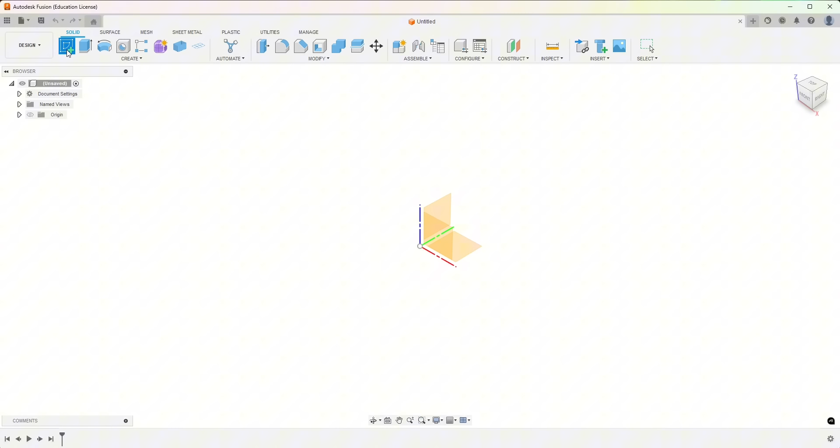So let's start by making a basic jar. I've showed this before, but I'll go through it quickly, and this way it's kind of easier than what I've shown in the previous video. So start with a cylinder and click this bottom plane. Again, you can make this any size you want. I'm going to make it 75 millimeter diameter, and we're going to go up 60 millimeters and hit OK.

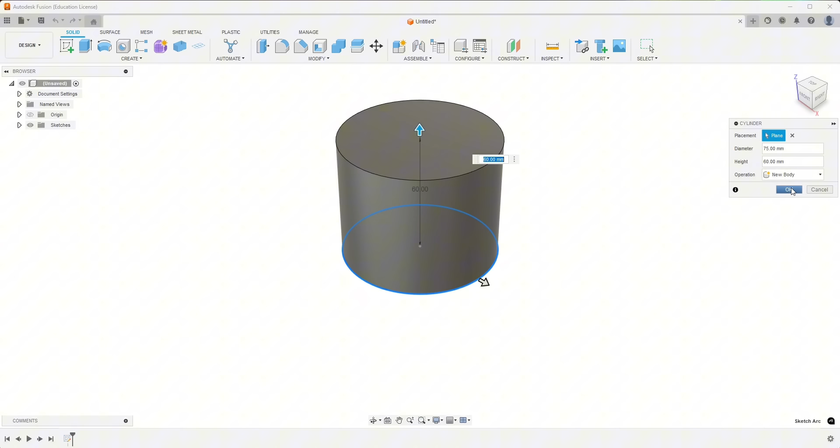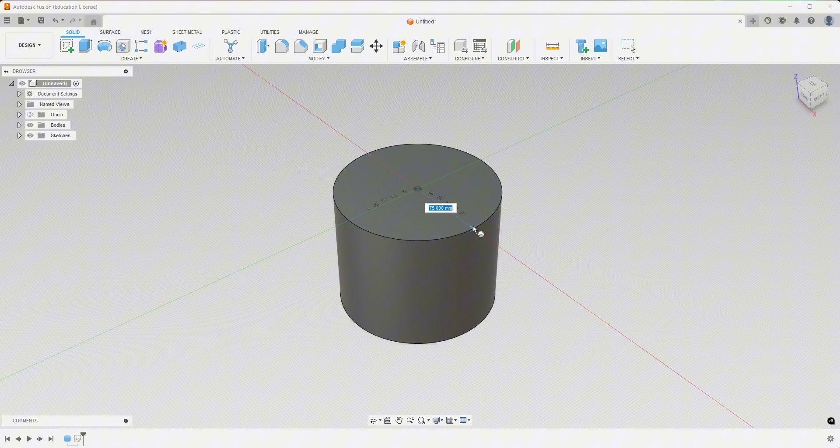So this will be the body of the jar, and we're going to do the thread portion. So let's make another cylinder. Instead of clicking on one of these planes, we're going to click on the top of the jar, click the center, and since this is 75, I want a 3 millimeter spacing here between the outside of the jar and the threads. So this will be 69. Hit OK, and we'll go up. Let's go up 10.

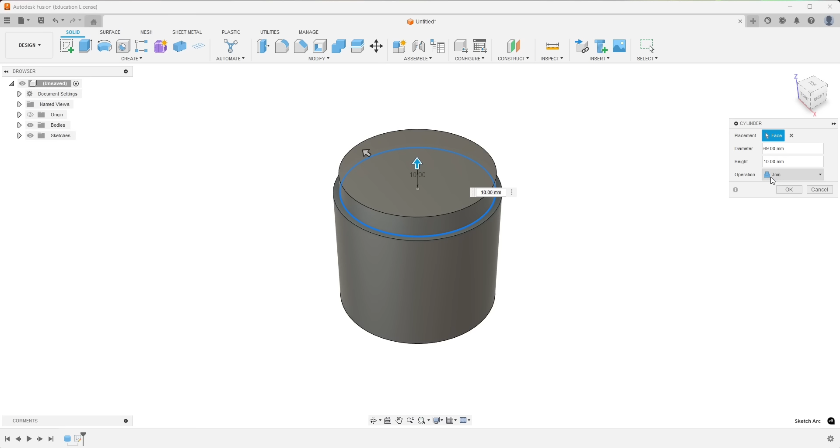And we don't want this second cylinder to be a new body. I just want to connect it to the previous cylinder. So I'll hit join and hit OK. And you can see when we go over to bodies here, now it's just one solid body. So we can go ahead and hollow this out. And to do that, we use the shell command or the shell tool.

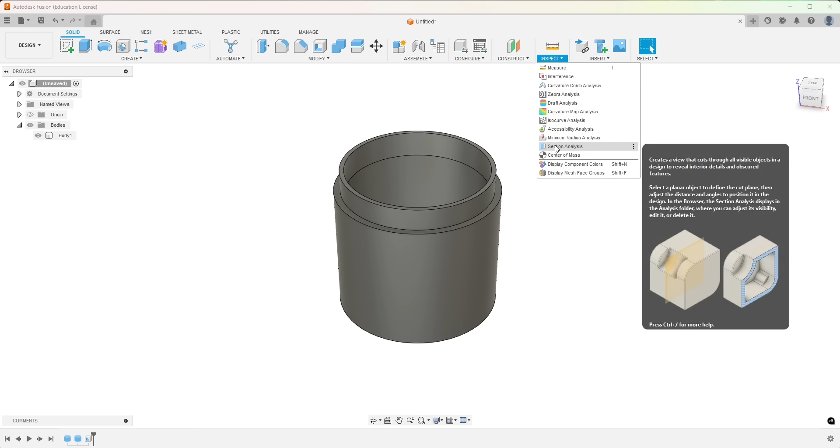So we'll click the top of this jar. We'll click shell and we'll hit 2 millimeters because that's how thick I want the walls to be. You can see that hollowed out that jar nicely. And hit OK. And I'm going to do a little section analysis here. So to do this, you hit inspect, section analysis, click this front plane here, and then you can hit this flip button to flip it around.

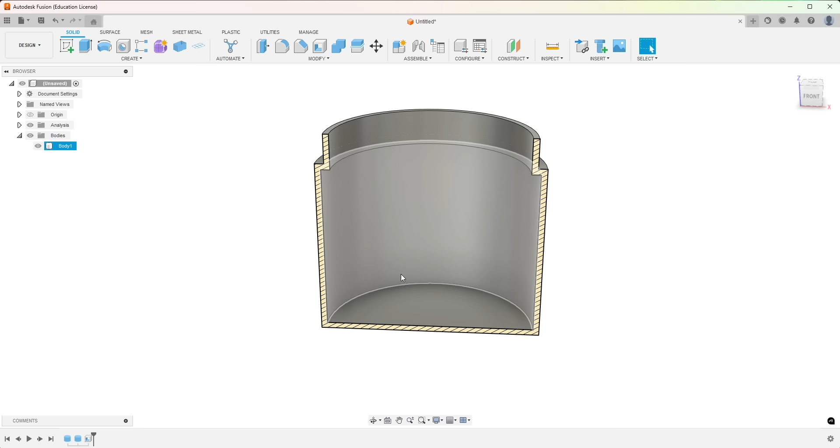And we got to clean up this inside a little bit since this will be 3D printed. I'm going to put a chamfer on these lines here. To select more than one line, I'll click off it to deselect it. You hold shift, so you can click while you're holding shift, shift click again, and now you have these two lines. And I'll do 3 millimeter chamfer and hit OK.

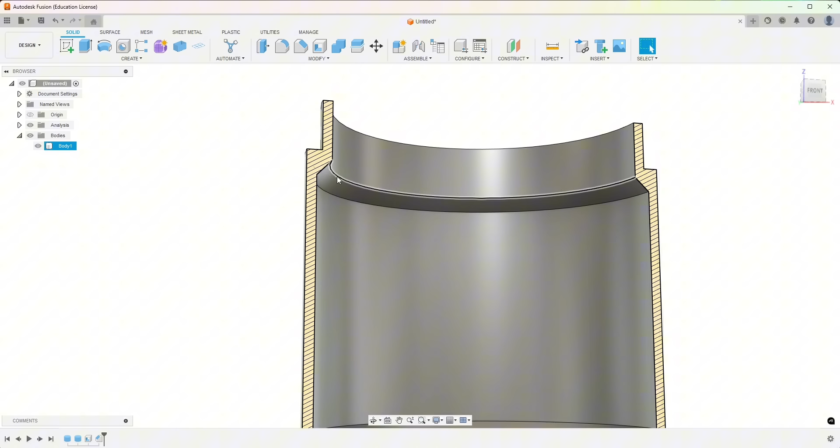Now the purpose of this chamfer below is just to strengthen this corner. When you 3D print this, this will make this connection between horizontal and vertical walls much stronger. And this chamfer is because when this was straight across at a horizontal line, there's a big overhang there. So the 3D printer would have problems printing that without some sort of support. So that fixes that issue.

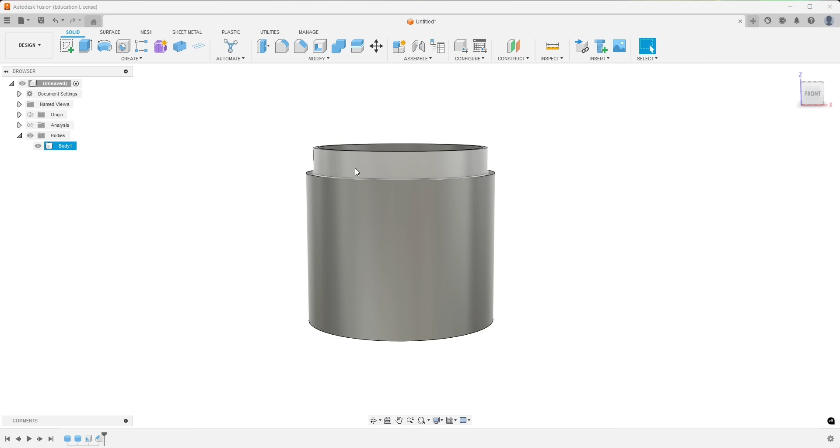So we can turn analysis off. When you make an analysis, there's a little tab over here, and you can make multiple different analyses, and you can turn them on and off. We're just going to stick with that one, so I'll turn it off for now. And now we'll make the lid. If you remember, we made this 10 millimeters high.

So let's make another cylinder for the lid. And we're going to click on this plane because that's where we want our lid to start. Click again in the center and drag out. And we don't want this to cut away from what's there. So we're going to do a new body.

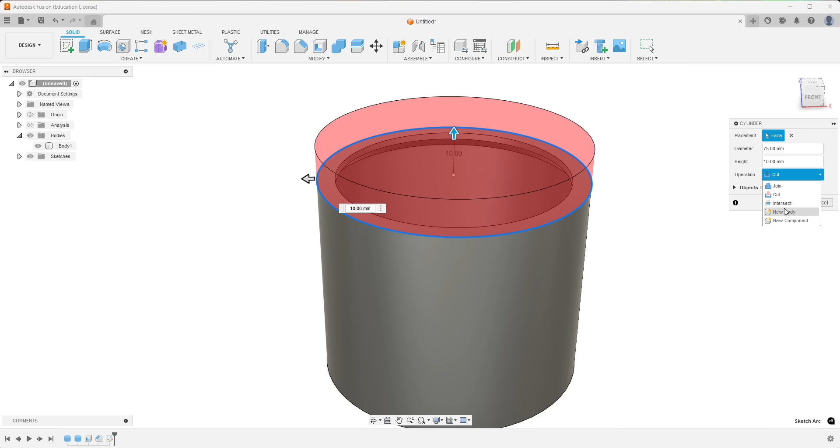And this needs to be at least 12 millimeters tall because the threaded part is 10 millimeters tall, and we need to have a wall thickness of 2 millimeters. So I'm going to make it 13 millimeters just to give us some space. So I'll hit new body because we don't want it to join or cut. Hit OK. And you can see now we have two bodies here. And I'll name these. So this will be the base.

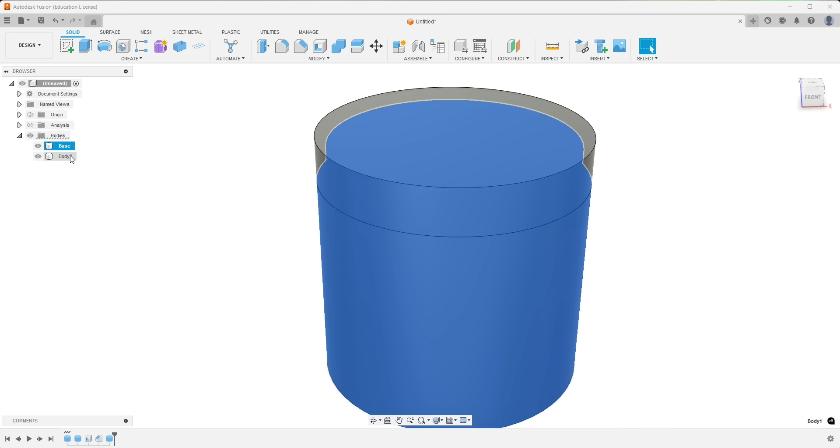And click in here again. This will be the lid. So we can hide the base for now. And we're going to do the same shell command here. So shell, and we're going to go 2 millimeters and hit OK.

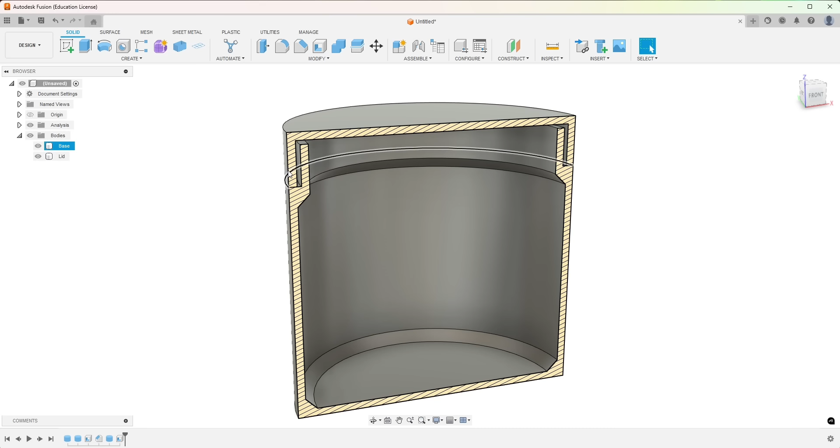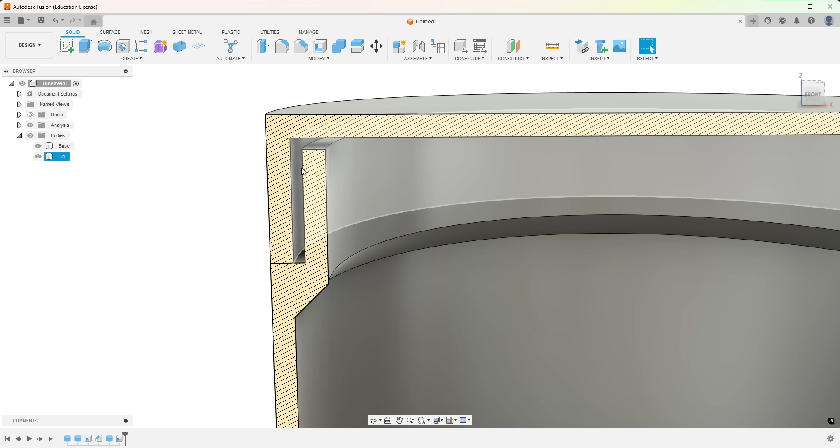So this is really important how I constructed this. No matter what size you make your jar, you want to do something similar, especially with the way I'm going to make these threads. So we have 2 millimeters of wall thickness here, 2 millimeters of wall thickness, and then a 1 millimeter space. Remember, we made this space right here 3 millimeters, and now we have a lid with a 2 millimeter wall thickness. So just remember this, 1 millimeter gap here, that's important.

Okay, so let's get making the threads. I'll turn my analysis off. So we're going to go to coil. And actually, before I do, let me make sure I got my measurements right. So this is 69 millimeters in diameter. Okay, so let me explain something before I do it. I want to make the height of my coil or thread. Oh, you know what? I'll explain it as I go.

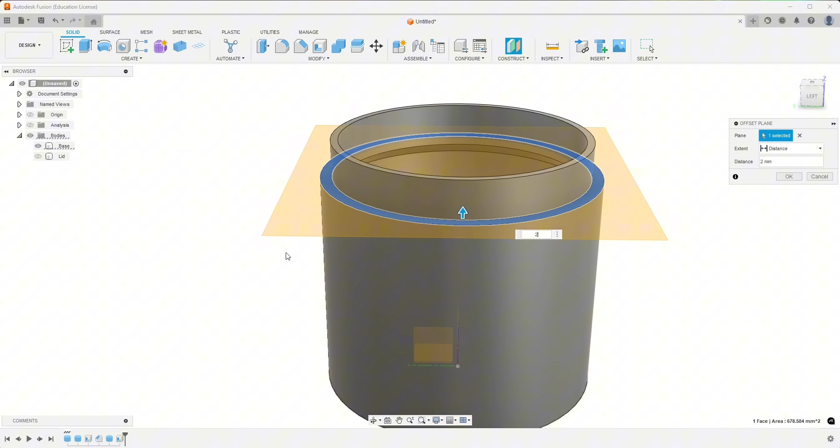It'll make more sense. So I'm going to do a construction plane because I don't want to start the coil on this plane because then the thread will be running into the bottom. I could do that and that's fine, but that's just not how I'm going to do it. So I'm going to click construction offset plane, click on this, and I'm going to go up 2 millimeters and hit OK. And now you can see I made a plane 2 millimeters above this base, and that's where I'm going to start my coil.

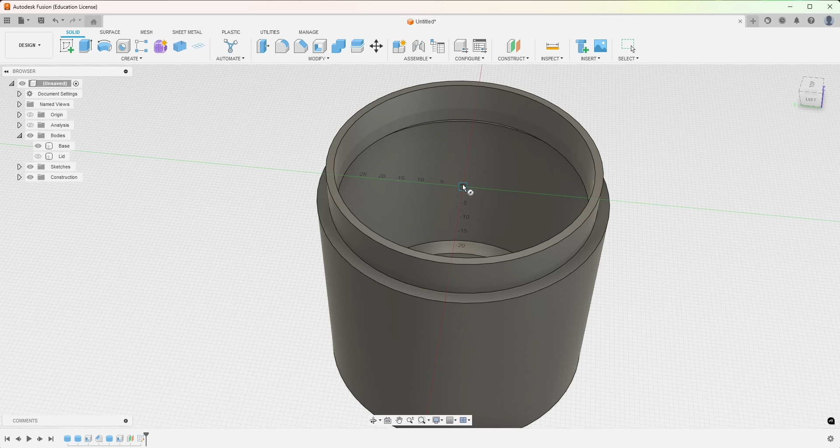So coil tool, and first it's going to ask me what plane I want to draw on. I'm going to do the one I just made, and I have to pick the diameter, so I'm going to click the center. And now, unfortunately, because we made that plane, I can't snap to any of these lines. But we know this was 69 millimeters, and I want to make it 0.2 millimeters less. So I'm going to do 68.8.

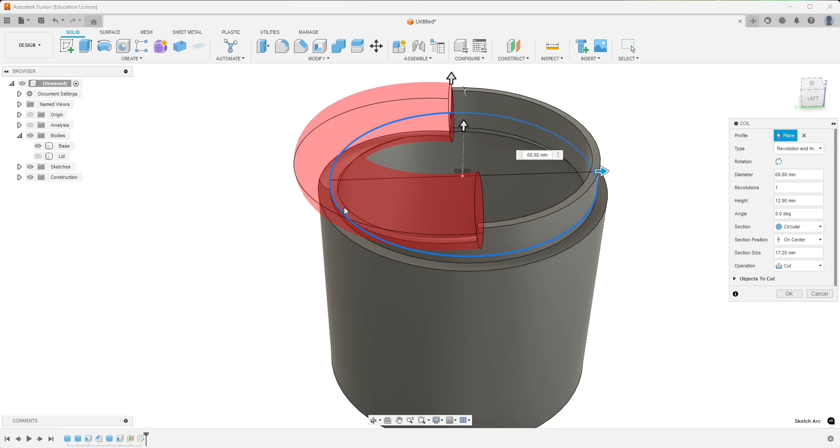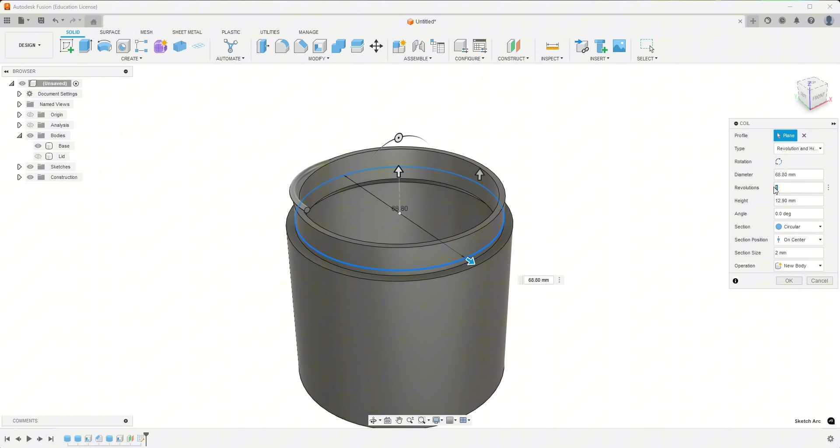Okay, so now here are all the settings on this side for the coil. We don't want this to cut. We want a new body. So you can see it turns it into a new body. The diameter of this coil, that's the section size here, is going to be 2 millimeters. The revolutions, I'm going to do 0.5, so a half revolution. And then I'm going to do the height at 6. And I'll tell you why I chose 6 height. The height is just basically the start of the coil to the top of the coil.

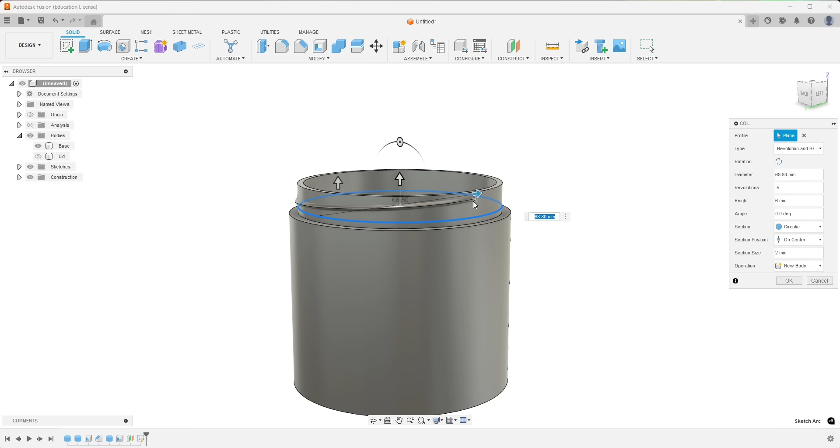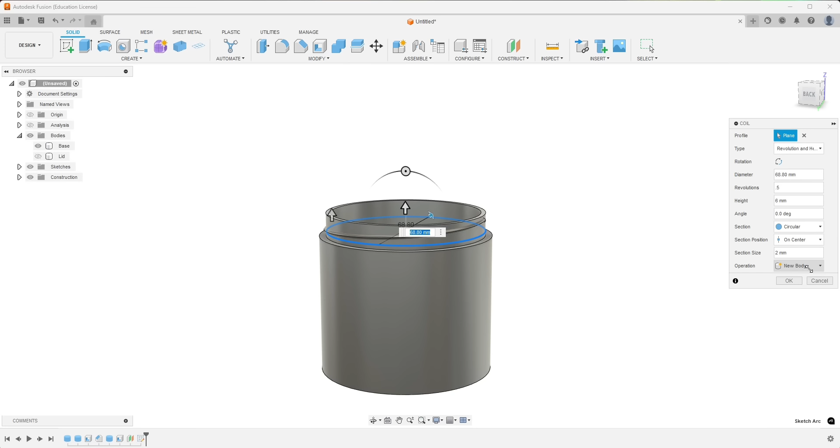Now, if you remember, this section here of the thread is 10 millimeters. So I started 2 millimeters up, plus the 6 millimeters for the coil, that makes 8. And then we have another 2 millimeters on top of the coil. So it's perfectly even. So we want to make sure new body is checked. And if your settings aren't like this, I have circular on and on center. You can change this to square and triangle. You can play around with this to make different types of threads, but I find this to work really, really well for 3D printing. So I'm just going to keep it as new body and hit OK.

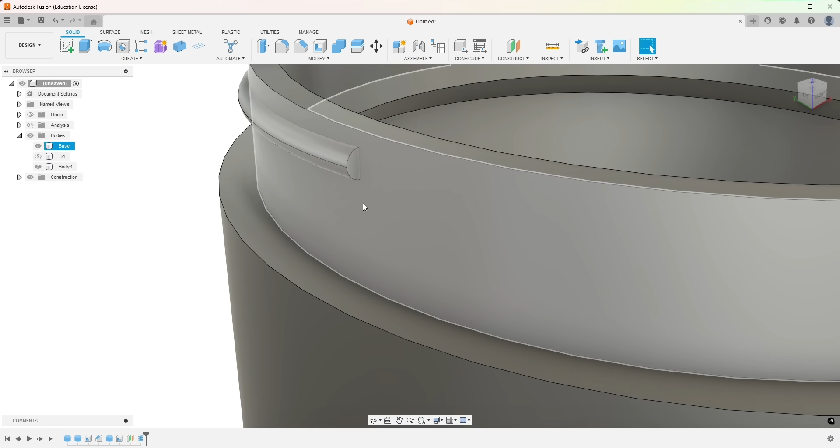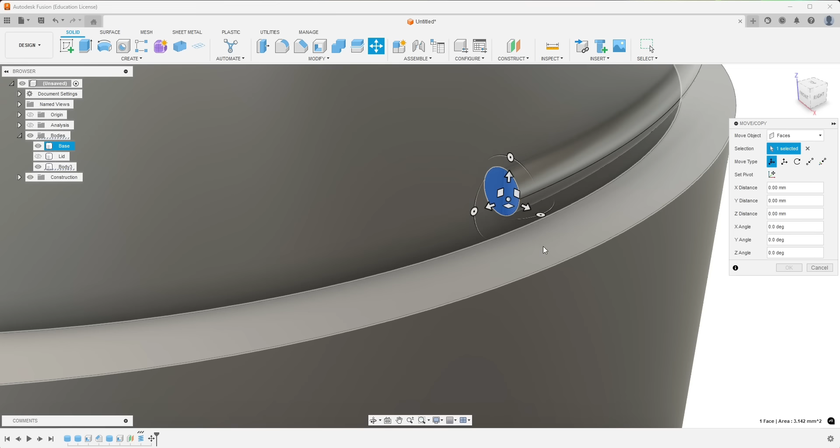And now you can see I've got a new body over here, which are the threads. So we're going to ease this sharp edge on both sides. So click on that circle and hit M for the move tool. And we're going to rotate 70 degrees and hit OK. And you can see how that rotated that face. And so now we're going to do the same for this side. M for move tool and rotate this 70 and hit OK.

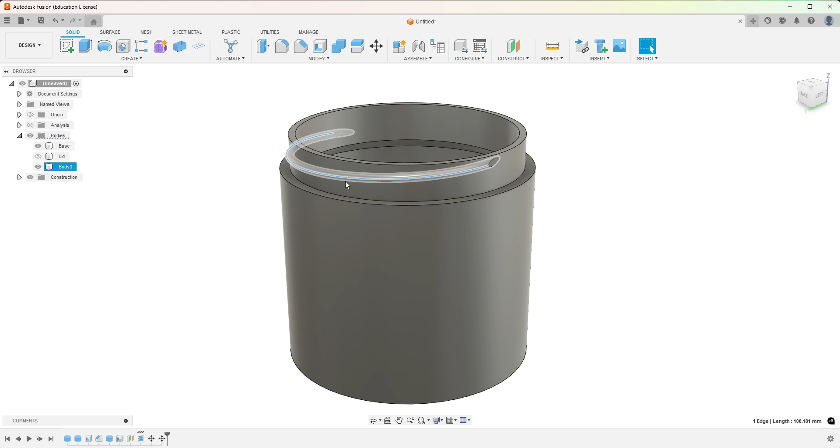All right, and now what we want to do to make this a triple thread is pattern this around this diameter or around the threaded area. So we can click on this body. You can do that by either clicking the body of the thread, or you can come over here and click the thread body, body 3. You're going to go up to create, pattern, circular pattern, and the little window pops up.

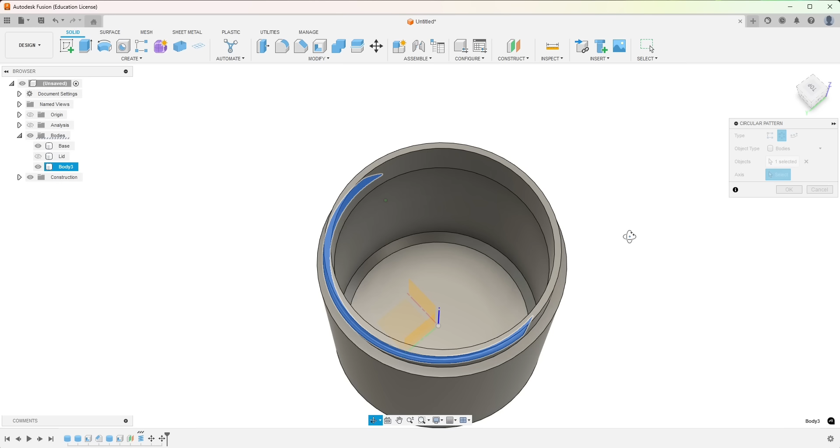The object type is the body we already have selected right here, and then it wants to know the axis, so you click this, and we're going to choose this Z-axis, but you can see the jar is in the way. You could rotate here and select it right there, but if you want to not do that, all you have to do is click and hold over the axis. This pops up, and then you can go down to Z, and it selects that Z-axis for you. Now you can see it just made a ton of them. If you go over here, it did 6 of them. We only want 3.

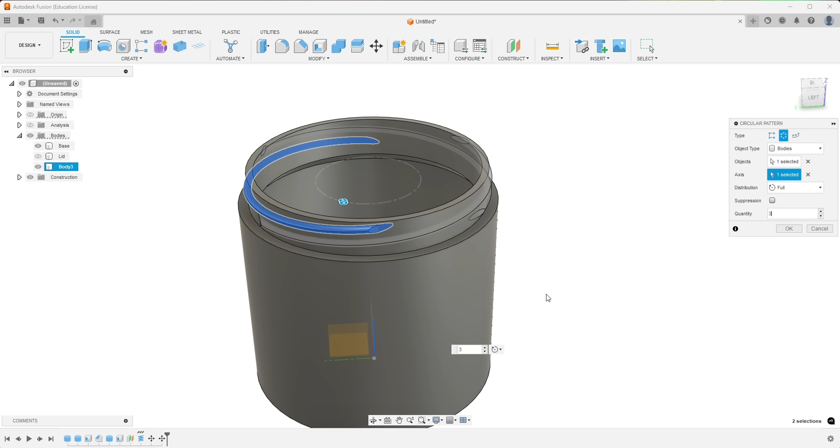So I'll hit OK. And let me just get my thing centered here. So here's my 3 thread bodies. And now you can see I've got a triple thread. And the reason this works is because there's no gap, starting here at the rim at the top, going down to the bottom.

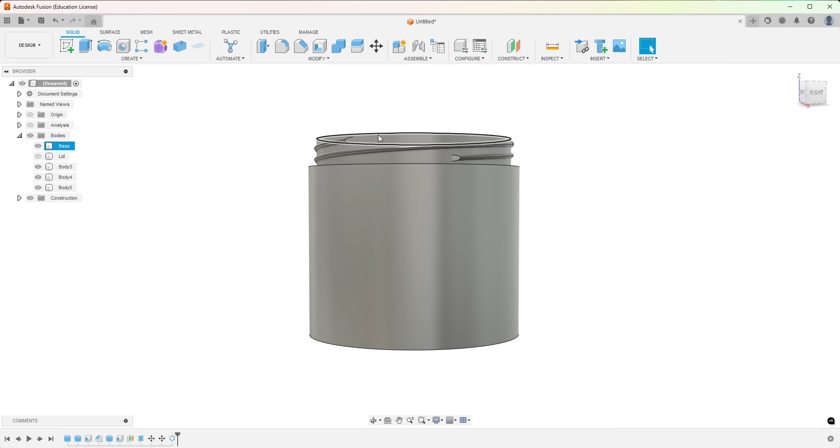There's no clear path to the bottom of this threaded area without running into threads. So if you're only going to do 2 threads, you have to make sure that those threads overlap each other. Otherwise, you could take the lid on and off without doing any twisting. So, okay, now we're going to join these together. We're going to make this one body. So we do that with the combine tool.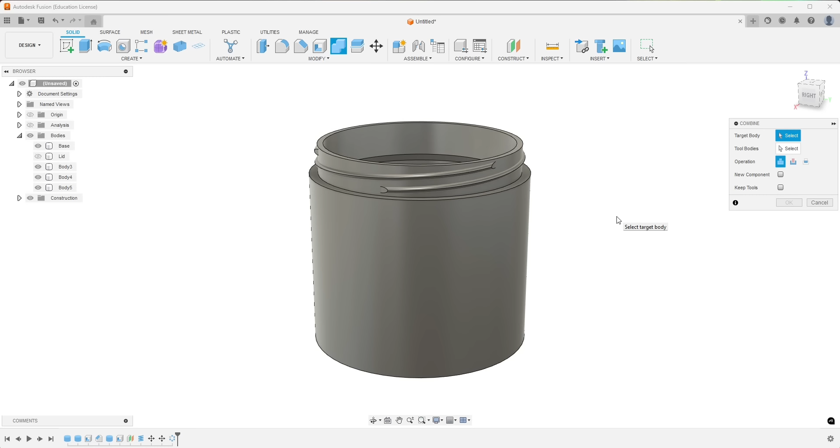And whenever you click on a tool, usually a little window pops up and you have to choose your options. So first it wants the target body. So basically the body that we're going to combine things to. So we're going to choose the jar as the target body. And then the tool bodies are the pieces that we're going to combine to the target body. I hope that makes sense.

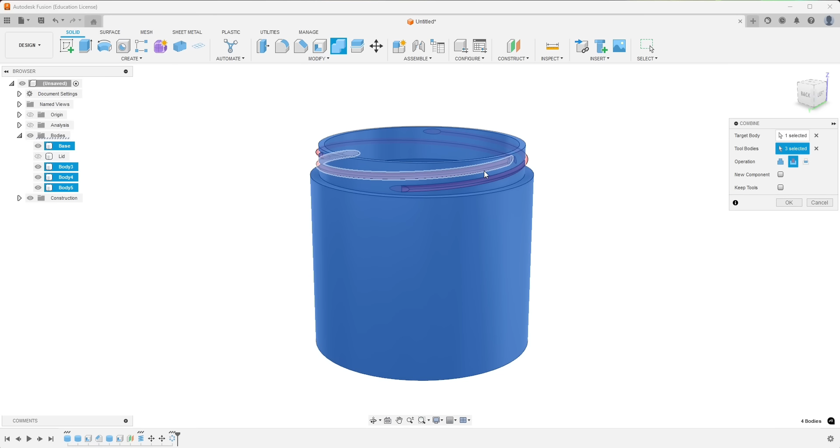So we can click on these threads and watch as I click here, you'll see this number go up here. So I have 1 selected, 2 selected, I'll rotate around, and 3 selected. And there's a few options here. We're going to do join, but you can do cut, and it'll cut those bodies away from the target body. Or you can do intersect, and it'll only keep where they're both touching, which obviously we don't want. So we're going to go to operation join.

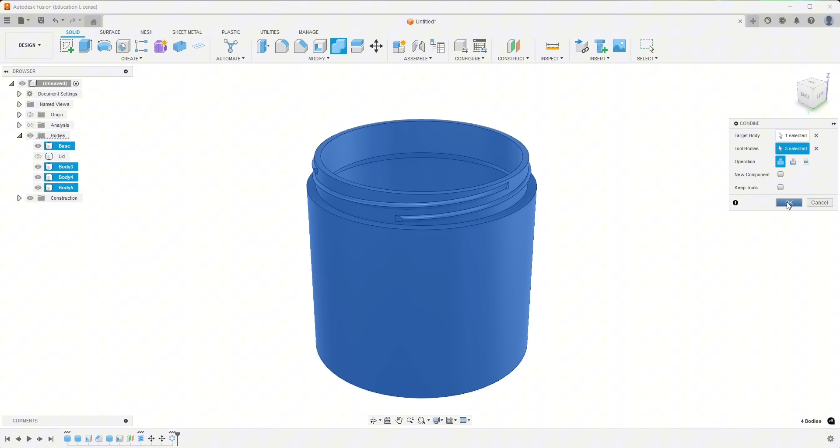Now you can choose to keep the tools. And remember, in this case, the tools are the threads. So if we clicked keep tools, it would combine this and make it all the base, but then it would keep these threads, which we don't need anymore. So we can leave that unchecked. So now you can see we only have the base body left, and these are now combined.

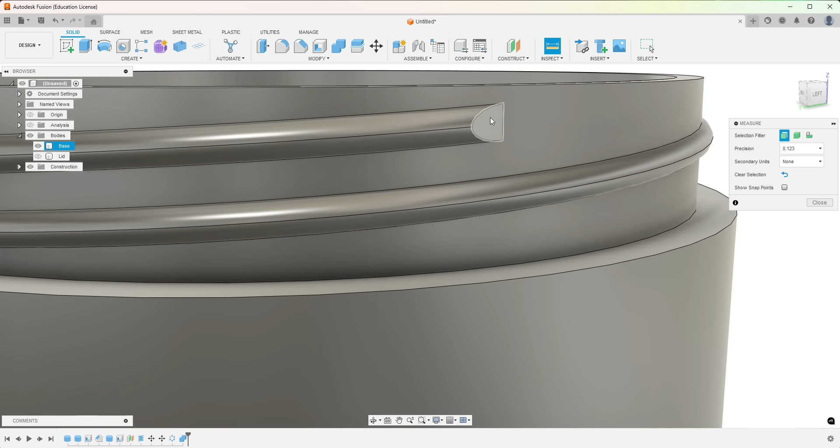Now, when you're making your threads, and I know I have to check this because I've done this before, you have to make sure you have enough space between threads. And I made this mistake on purpose just so you can see how to fix it. So if we go to inspect and measure, we can click on this line and this line, and we have just a little over 2 millimeters of space here. And if you remember when we made these threads, we made a 2 millimeter diameter circle, which means we have hardly any allowance here for the threads on the lid to sneak through. So that's not going to work.

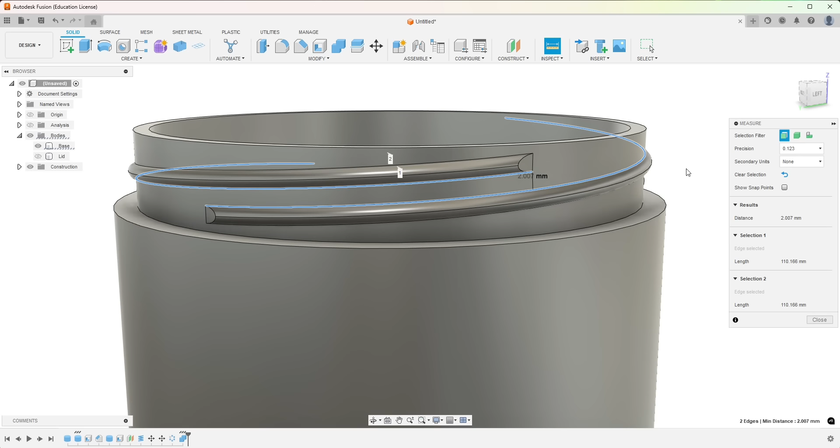So what we can do, cool thing about Fusion is you have this history down at the bottom. And this is where we made the coils. And so we can double click on these coils, and we can make changes and it will update along this history as long as the changes don't affect anything past this feature. So I'm going to change the height to 6.5. And you can see that just lifted that up a little bit. And now I'm going to hit OK.

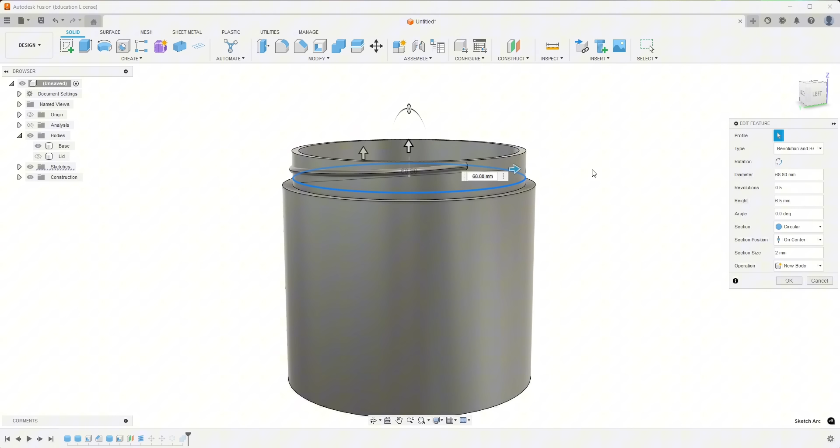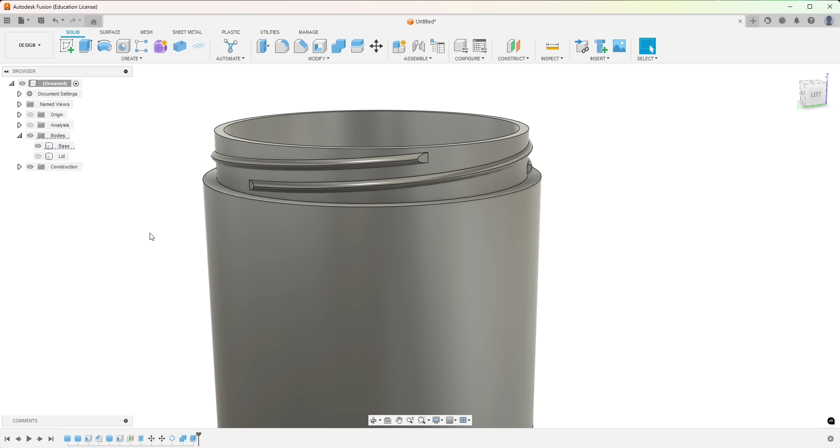And that does mess with my even spacing, but you know what? We can change that too, because I can just select this face right here and hit E for extrude and go up 0.5. Now we have 2 millimeters here, 2 millimeters here. Definitely not necessary, but sometimes I'm a perfectionist. So now we can measure this space again. So we can hit the measure tool, click this line and now we have 2.339 millimeters. So we have enough space for the other threads to fit through with an allowance as well. So we can hit close.

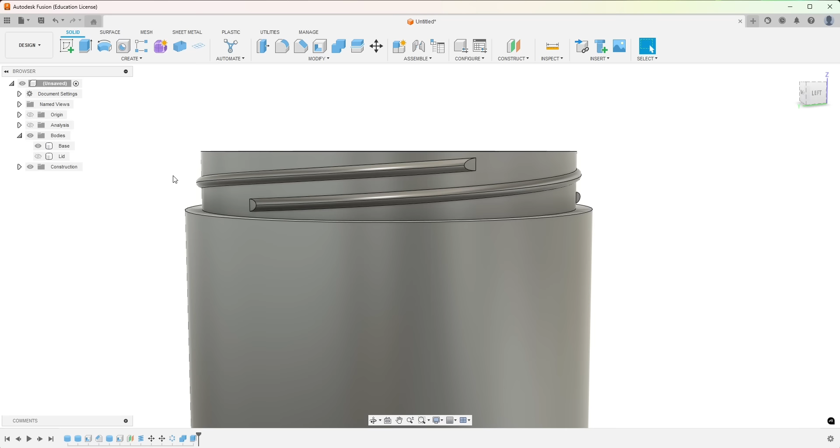So that's good. So now we just have to remember those settings for the lid, and we're going to do the exact same thing, except the diameter of the coils will be a little different. Remember, we started the coil from the inside and went out, and we inset it by 0.2 millimeters here, and you'll understand why I did that inset of 0.2 millimeters when it all comes together. So for the lid, we have to add 0.2 millimeters.

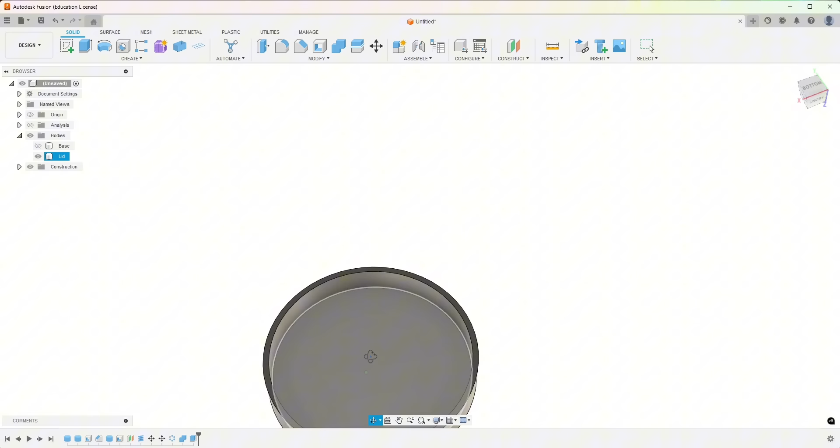So let's do the lid, and we're going to circle around here so we're face up. And we're going to do the exact same thing we did for the base. So I'm going to do a construction plane. I'm going to go 2 millimeters off the base of it. Let's start our coil. So create coil. We're going to click on this plane.

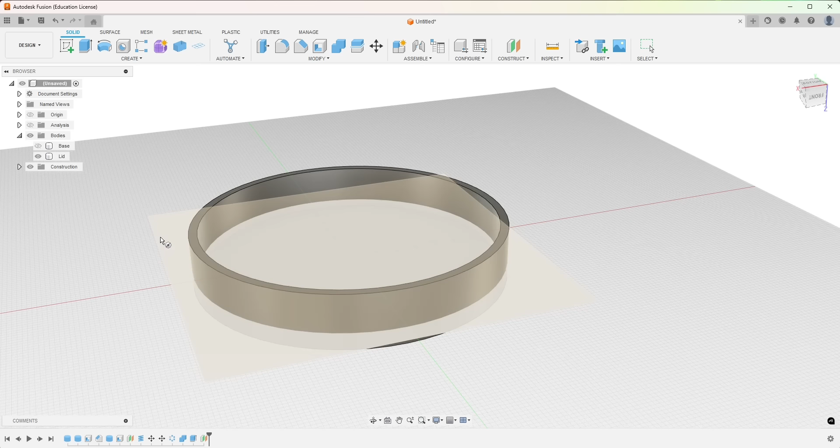And we're gonna draw out. Oh, I'm gonna hit escape real quick because I forget what diameter this is. Remember that now the coils go on the inside face. So on this inside, you click on this rim and you go all the way down to the right, 71 millimeters. So we need to make it 71.2 millimeters.

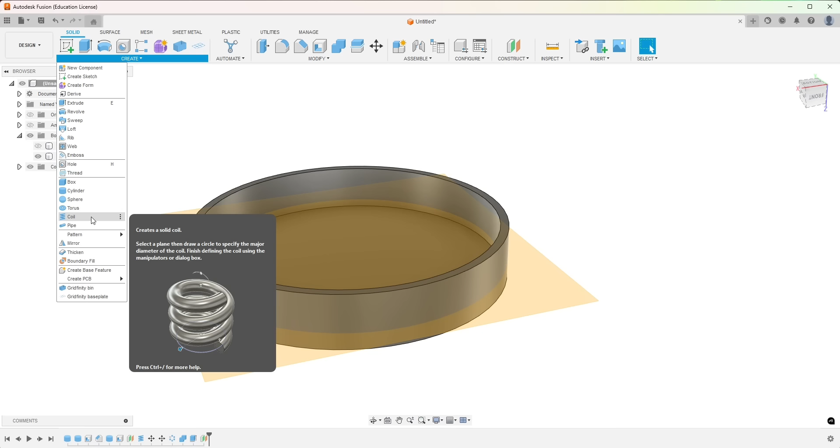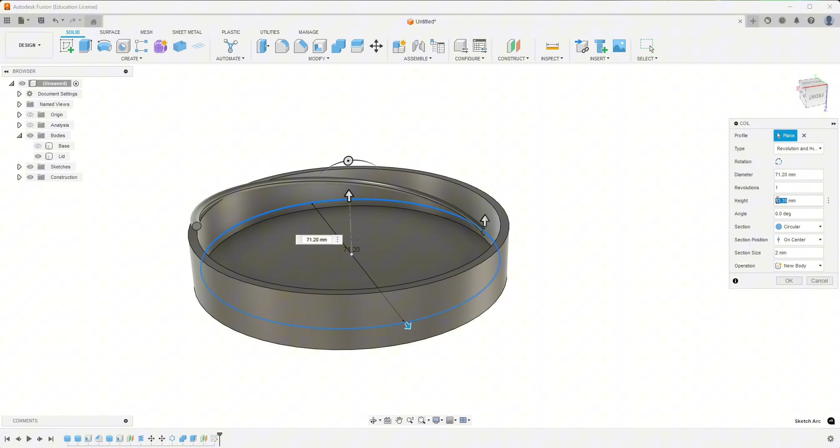So let's go to coil, select this face, select the center, and we can just type in 71.2 and hit enter. And we have to go through the settings again. So remember, we want a new body. The section size here is the diameter of the coil. Circular on center is both fine. The height, we're going to do 6.5 to match the jar, and the revolution is going to be 0.5. And here you can see that diameter, so you can make changes here with that too. So that looks good. We'll hit OK.

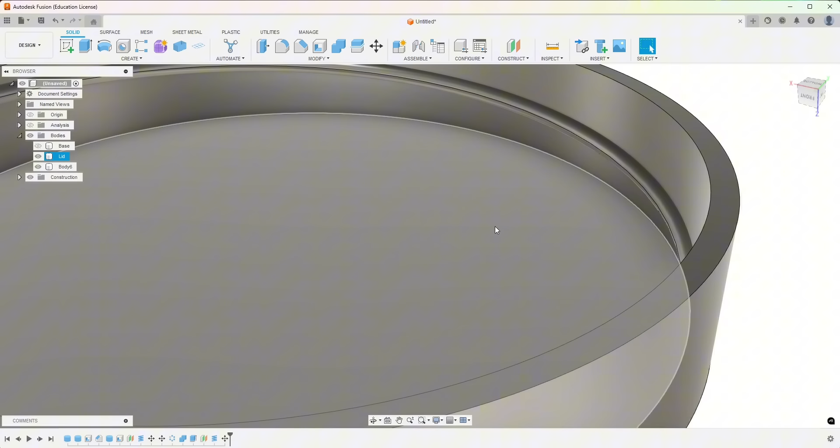And we'll do the same thing. We'll hit M for the move tool. Same thing we did on the jar. Base. And hit OK. Scroll over here. M again for the move tool. And grab this little rotation handle and 70 degrees. Hit OK.

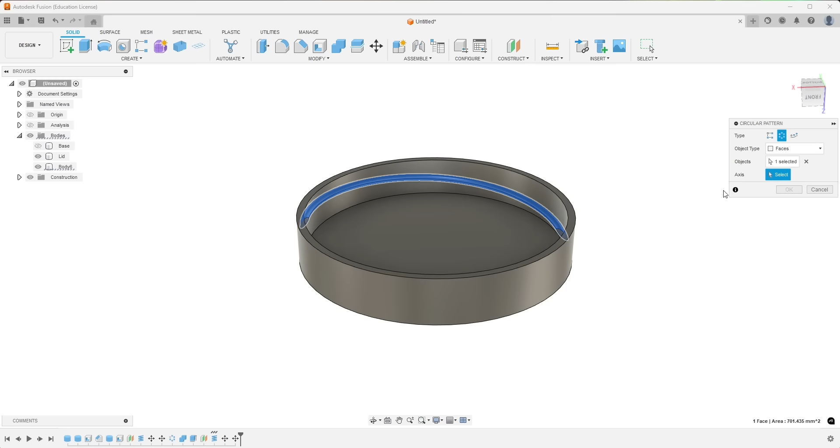And now we can pattern this around. So we can click on the body or the thread. Create, pattern, circular pattern. The object is already selected, so we're going to click axis, and now we're kind of upside down, remember, so we're going to hit that z-axis, and it remembered my 3 for quantity, so I can hit OK. Oh, it just gave me an error. What's going on? Let's try this again.

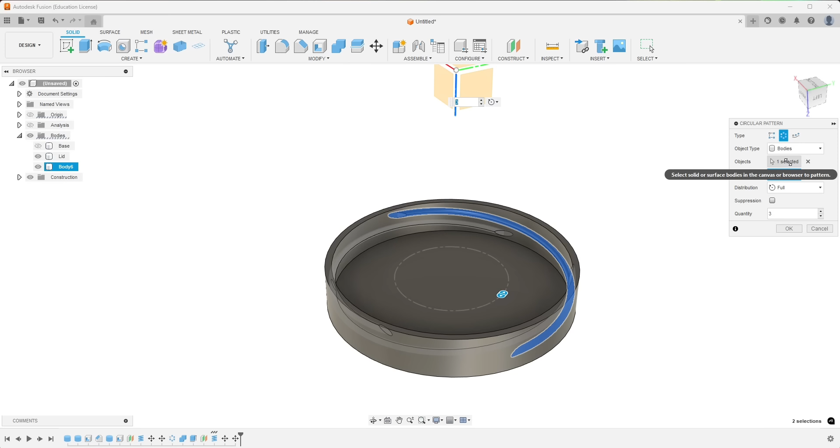So body, create, circular pattern. The axis will be the z-axis, and we have 3. Let's hit OK. There. Not sure why I got that error before, but it worked the second time. So there we have our 3 threads again. And like before, now we have to combine them. So we're going to go to the combine tool.

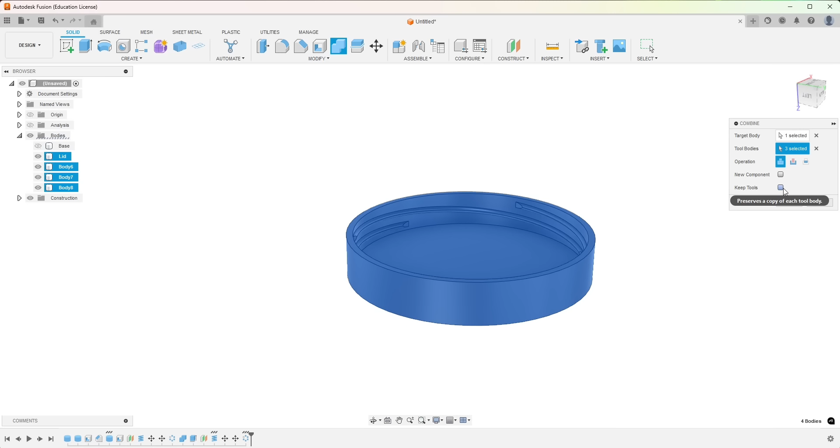The target body is the lid, and then the tools are the 3 threads. And there's a few ways to check that you have everything selected right. There's 4 objects here, so the lid and the 3 threads. Over here we have the target body, which is the lid, and the 3 threads. So we have everything selected. We're joining, and we're not keeping the tools. So hit OK.

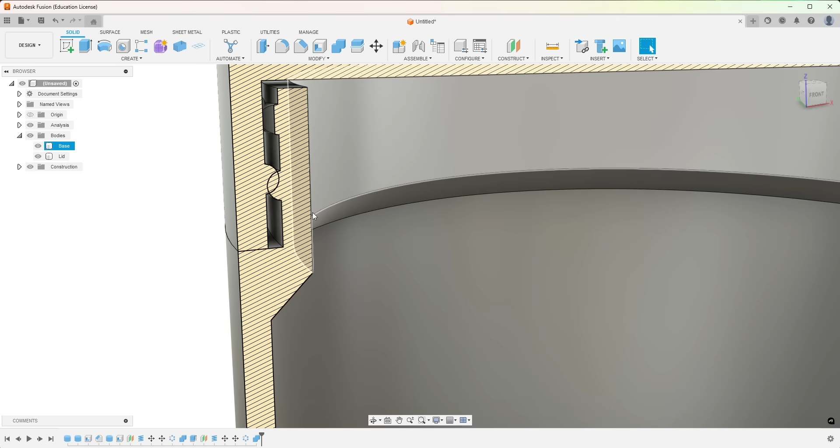So now let's go back to our home view here and make the base visible. And let's go back to our analysis that we had made earlier. And you can see how it's set up now. Those threads are running into each other. And that's okay. We could leave it like this and just move this lid and print them, because we're not printing them together like this, so it would still work. But to clean up our Fusion 360 model, let's rotate this lid so there's nothing touching here.

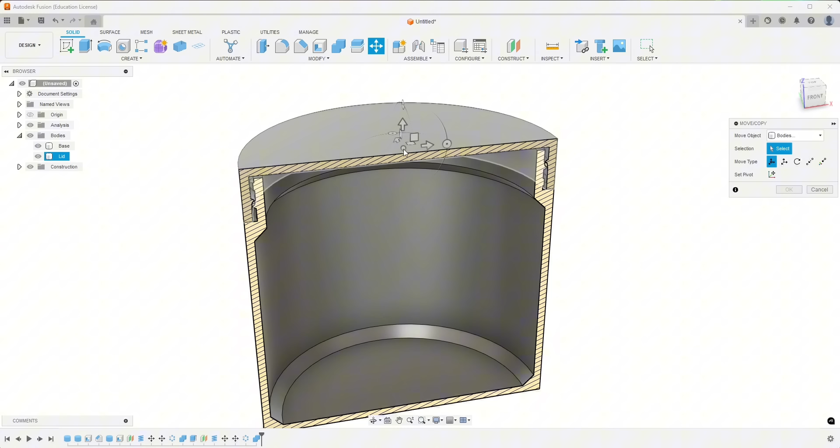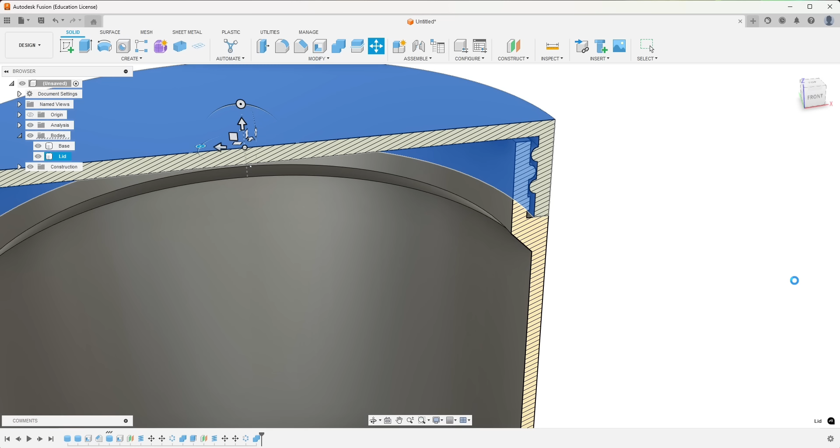So what you can do is hit M for move, and you want to make sure this free move selection is set. There's a bunch of different options for move, but this is the one that gives you the most freedom. So you're going to just, without clicking, drag to the center, and it should snap to it. And now we can use this rotation handle and rotate it. And as I'm rotating, watch the threads. See how they're moving. And now you just stop at a point where nothing is touching and hit OK. So now you can see none of the threads are touching.

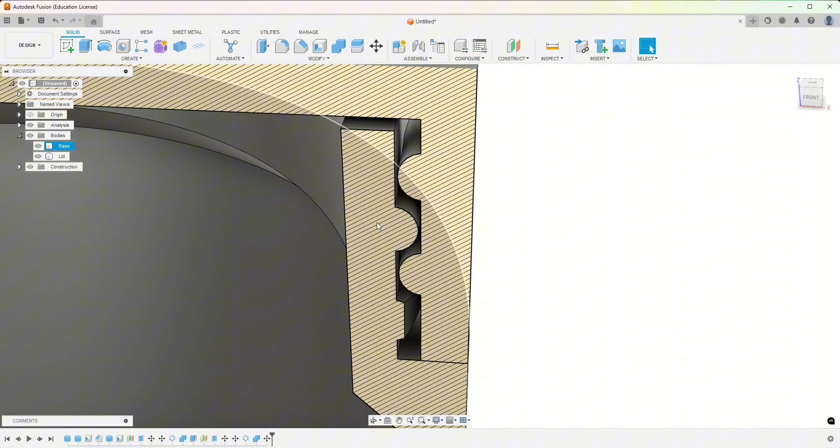And this is a great time to tell you why we did what we did. Remember, we have a 1 millimeter gap here, but a 2 millimeter diameter circle, which if we put it right on the center line, would fill this hole. This edge of the circle would be touching this edge, right? Which is why we inset this by 0.2 millimeters on the base and then by 0.2 millimeters on the lid. And now that gives us this nice allowance between the threads in the jar. Okay, and that is pretty much it. There are your triple threads.

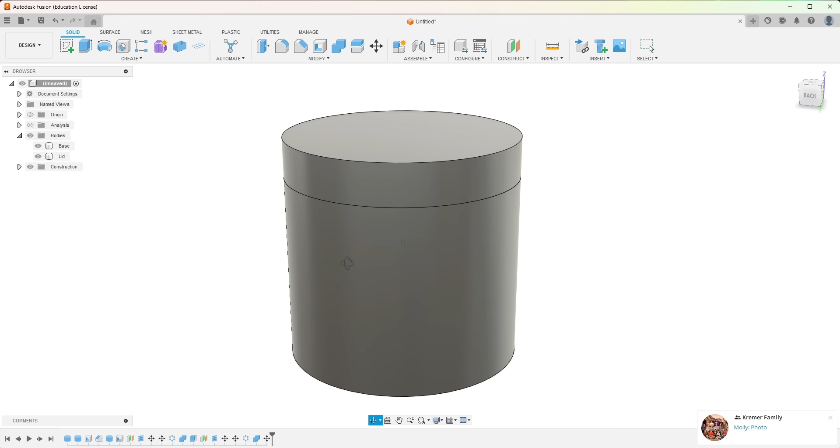Okay, so normally I would be done here, but I had a suggestion in the last video that it would be nice to 3D print this, so I can show you guys how well the threads work. And so I'm going to do that right now. The problem is I don't like printing plain jars like this. I mean, it's fine if you do. One, because then you can see the seam line, which always looks horrible to me. So we're gonna fix that a little bit, and then we're gonna clean this jar up just a tad. So first, I'm gonna start by adding a little chamfer.

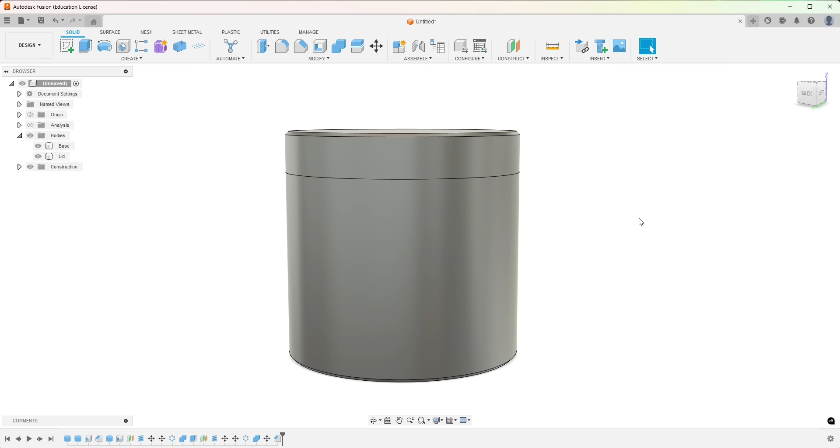So I'm gonna select both the top and bottom edge, hit chamfer, and you can just type in 1 on the keyboard, and it'll give it a 1 mm chamfer. That just makes sure there's no sharp lines. And then I'm just gonna put a little pattern on the base at least. Maybe we'll just leave the lid alone for now. And that way we don't see an ugly seam. We'll kind of hide the seam.

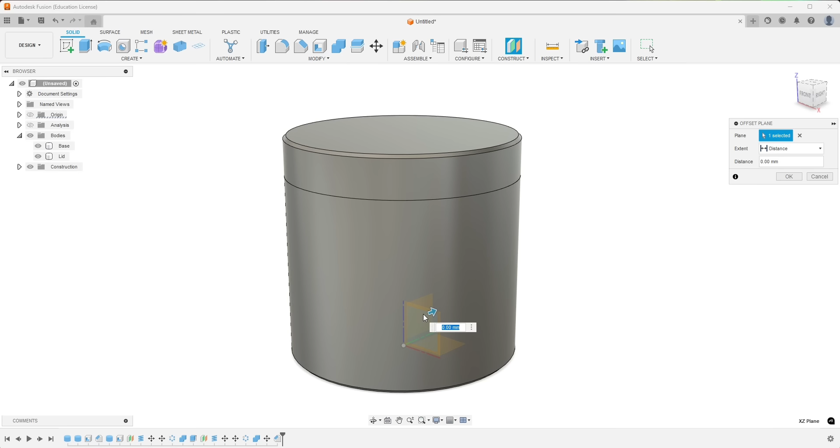So let's do a construction plane, and we'll do it on the front. When you do a construction plane, you pick your plane and then you can move it. So I'm going to move it just out front and hit OK. We're going to hit create sketch on this plane, and we're just going to do a very basic slot, and I'll kind of show you what this is going to look like. I'm not even going to measure this. We'll get close here.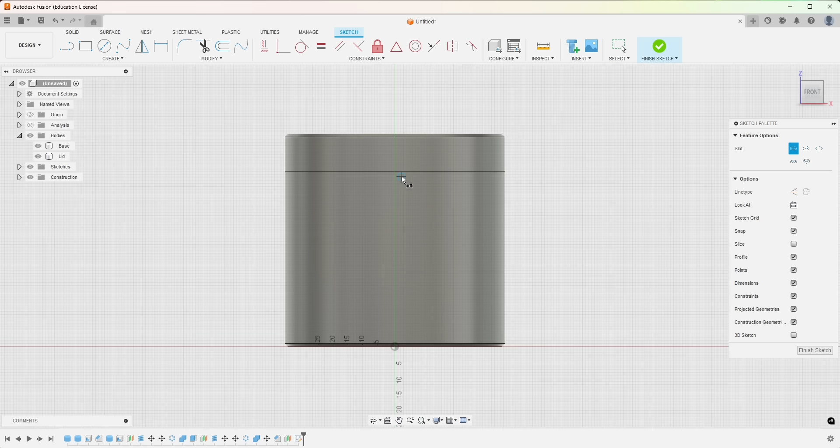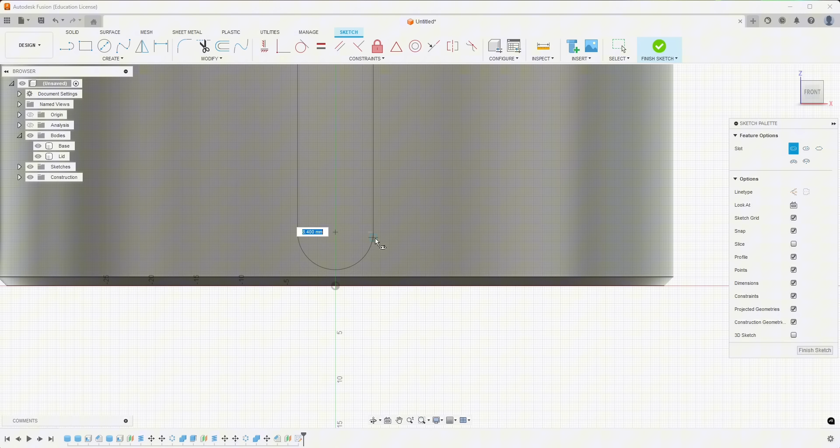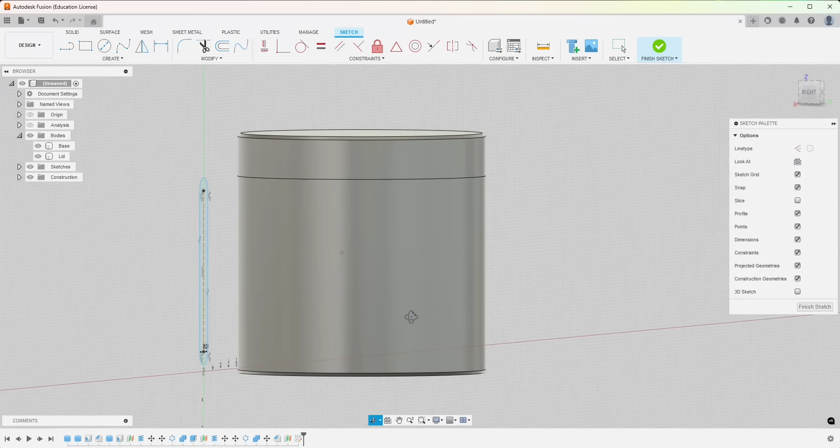So there's 1, 2, 3, 4, 5. We'll start at the 5th one, and we'll go 5 from the bottom. We won't count this one. We will. 1, 2, 3, 4, 5. We won't count that one. And we'll go 8 and hit enter. Sorry, I was actually counting these squares right here because I was just eyeballing it instead of measuring it, and that's pretty dang close there. So we basically have 1 away from the top and 1 away from the bottom, not counting the chamfer. So you can see I drew that off of the jar.

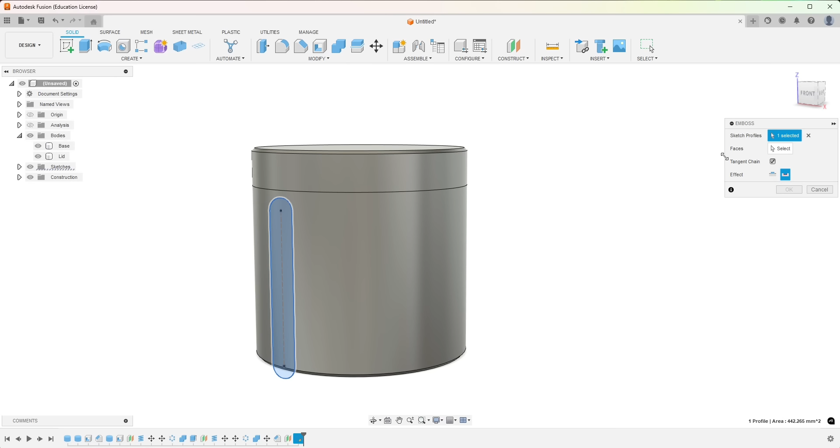So I'm going to finish sketch, and now what we're going to do is emboss. So I can select the emboss command, and again that little window pops up. It wants me to select the sketch profile first, which is this. Then we're going to select the face, which is the jar. And you can either emboss it, which means it's sticking out, or you can deboss it, which means it's inset. Now remember, our walls were 2 millimeters thick, so you don't want to go 2 millimeters here, but we'll go 1 millimeter and we'll call that good. So I'll hit OK, and we just embossed it onto this surface.

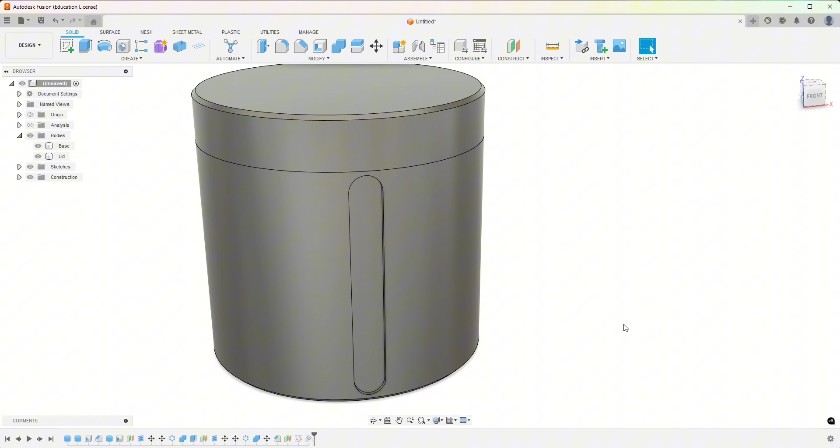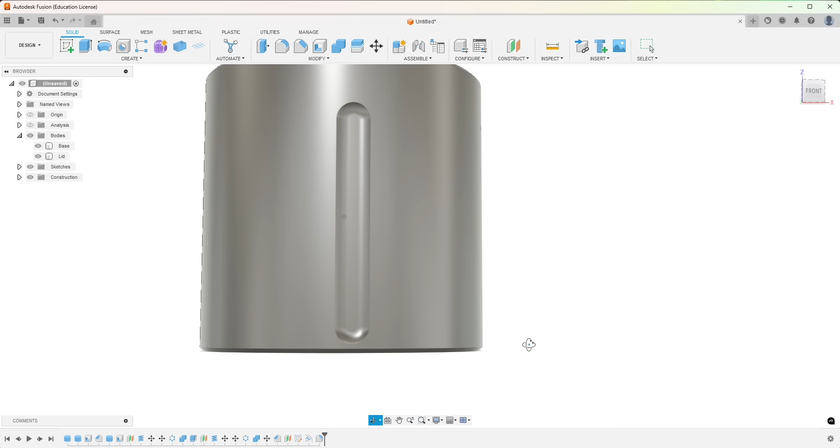And I don't want these hard edges, so we'll click this plane, and this time we'll do a fillet, and we'll do maybe like 5 millimeters and hit OK. And if you want to see how that will look without all these lines, you can go to this display settings, go to visual style and shaded, and now you can see kind of that nice rounded feature we made. So visual style, shaded with visible edges is what you want to be when you're designing. And there's other options. You should play around with these down here and figure out what you like seeing best as you're designing. But this is kind of the default setting, and it's what I like.

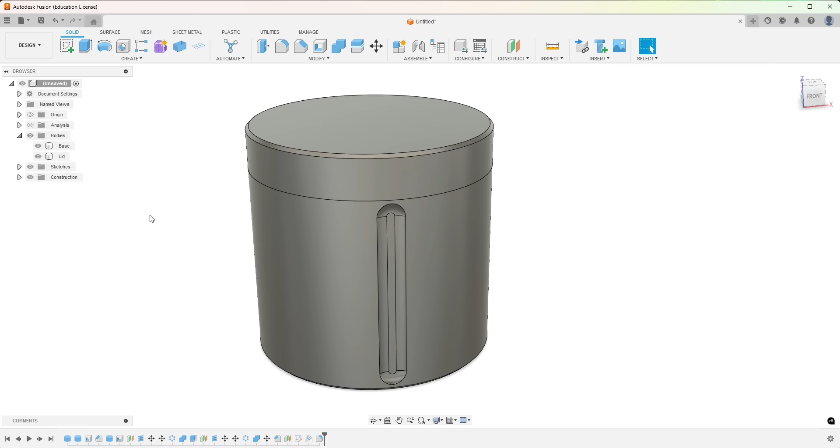So we're going to do that circular pattern again, just like we did with the threads. This time we'll be doing it a little different. So I'm going to select the emboss feature down here. Then I'm going to hold shift and click on the fillet. So now you can see the whole feature is selected, and we're going to go to create pattern, circular pattern. And now, since I already have the feature selected, you can see that it has features selected. So you want to make sure that's selected. We have 2 of them selected.

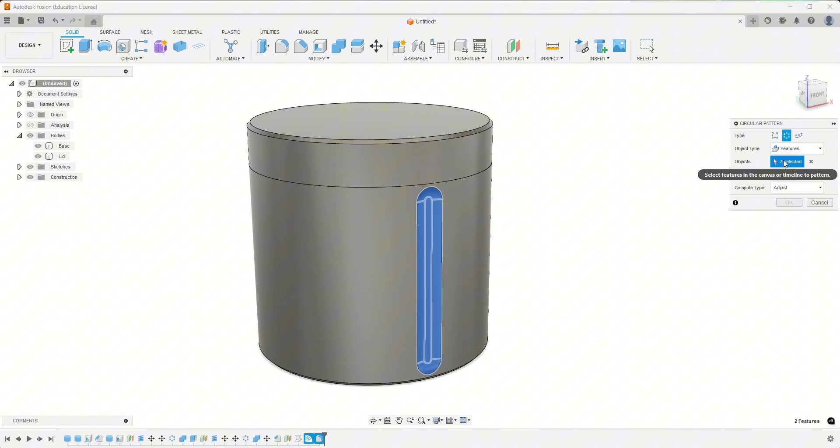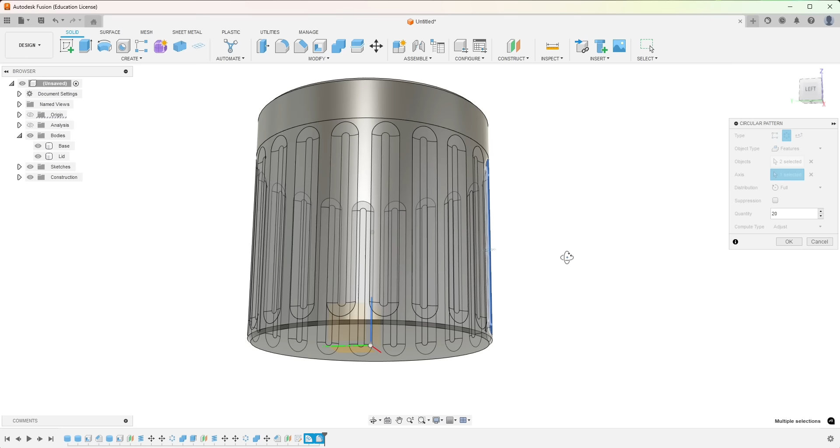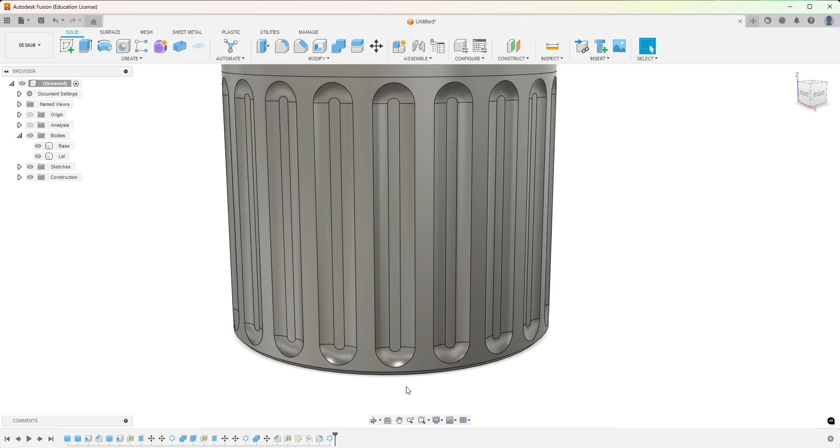We're going to click the axis, and remember, the z-axis is hidden from us here, but if you hover your mouse over it and click and hold, it'll pop up and you can click z-axis. So it's doing a quantity of 3, so let's do 20, and we'll hit OK. And now you can see, if we do that visual style again, shaded, there is our jar. So now when we 3D print this, we will only have a very small section of the seam visible. We'll have one little seam right here, and we'll have a little seam up top.

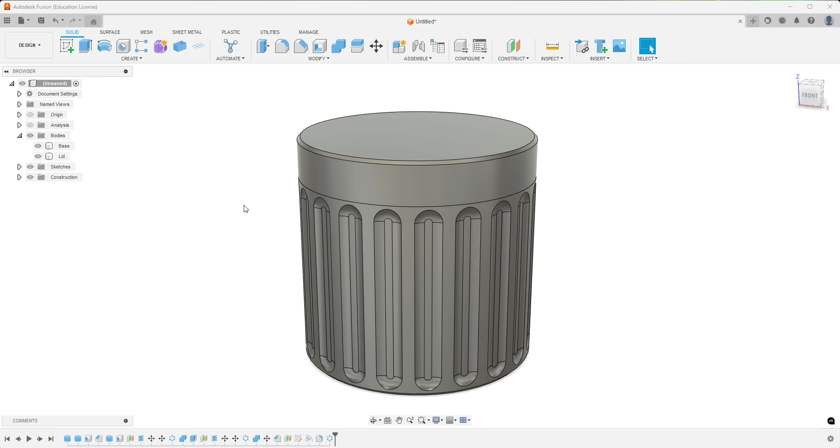And you know what? I'll just keep the lid with nothing on it. So there will be a seam on the lid, but that's okay. That was just like a little bonus on how to do the emboss. We're really just looking to print this to see how those threads are going to work. So I will end the Fusion 360 portion right now. I will send it over to my 3D printer and get that printing, and I will show what it's like when it's done.